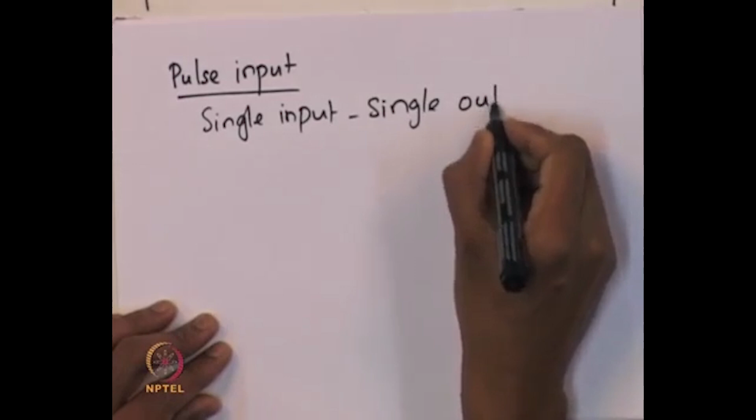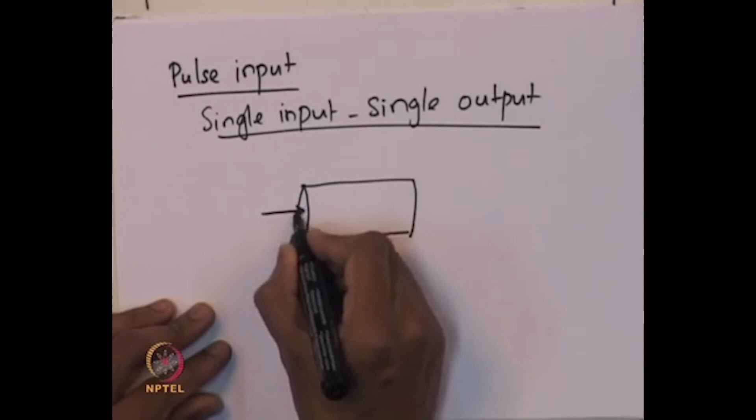So, now suppose we consider a single input single output system, that is, suppose there is a reactor, and there is a single input stream to the reactor and a single output stream from the reactor. And suppose there is a feed stream here, and let us say that we inject the tracer,

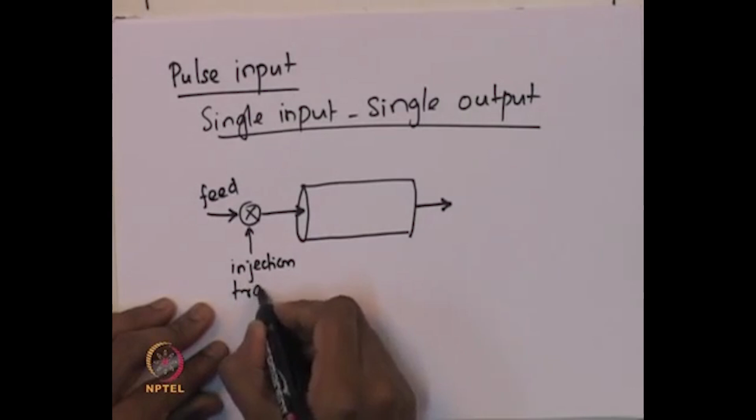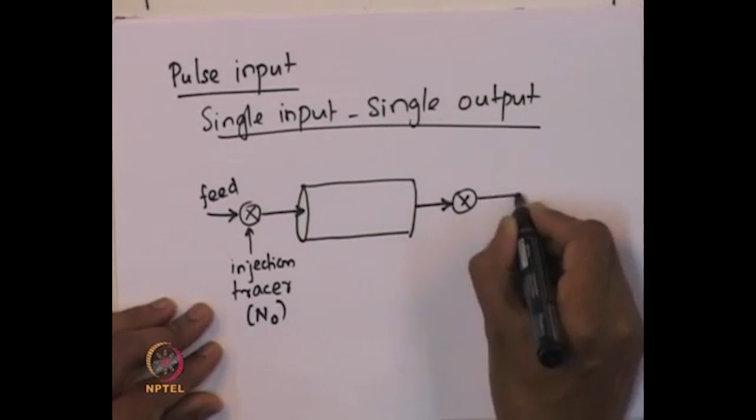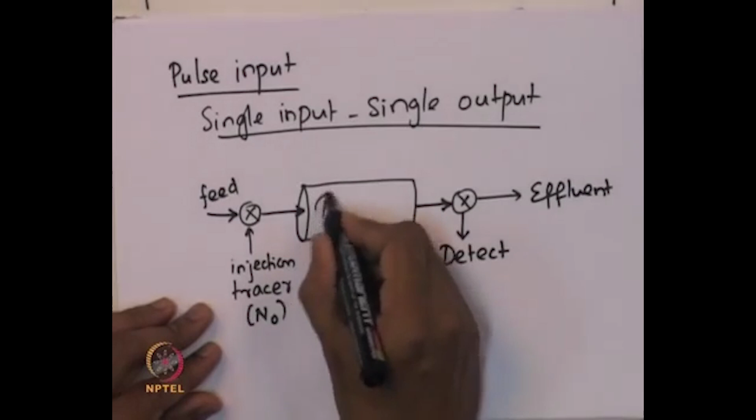along with the feed which goes into the reactor, and maybe the total concentration of the tracer is N naught, and it has to be a pulse tracer. We will describe in a short while what is meant by a pulse tracer injection. And then suppose there is an effluent stream, and we can detect the concentration of the tracer in the effluent. So, this is a reactor with a single input and a single output.

So, now the tracer that is injected has to be a pulse at a certain time. Let us say at time t equal to 0, we inject a pulse of tracer, that is, a certain concentration of the tracer in as short a time as possible is injected into the reactor. That is what is called a pulse input. Suppose this is the concentration of the tracer, and this is minus tau, some time before and some time later. Some time before the injection point there is no tracer in the reactor, and some time later also there is no tracer in the feed. So, just give a short pulse and then leave it.

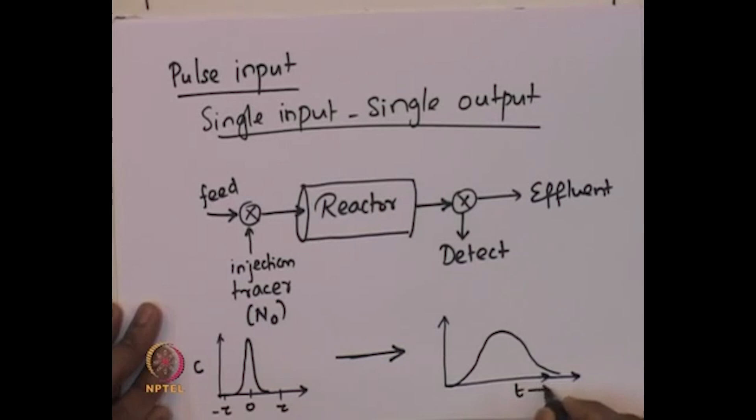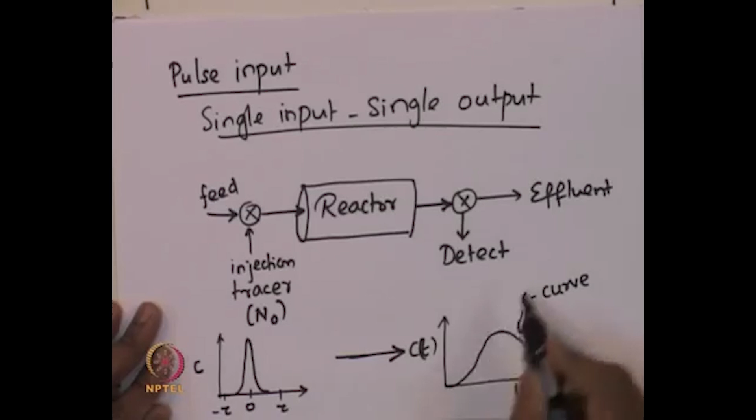Now, once we do this, if we monitor the concentration of the tracer in the effluent stream of the reactor, the kind of concentration profile that one will expect looks like this. This is time and this is the concentration of the tracer as a function of time. This kind of curve is what is called the C curve in residence time literature. So, the concentration of the tracer as a function of time is the C curve. So, now if such is a system, the question is how do we find this concentration curve? So, how do we find this?

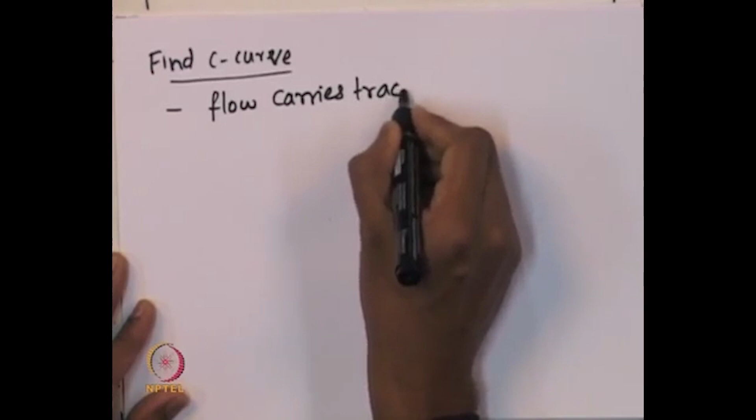We need to find the C curve, and how do we find the C curve? So, we have to make some assumptions. So, if we assume that the only fluid flow through the reactor is the only one which is actually carrying the tracer, which means that there is no dispersion between the point of injection and the entrance of the reactor. And later in one of the lectures, we will actually account for the presence of dispersion in the reactor.

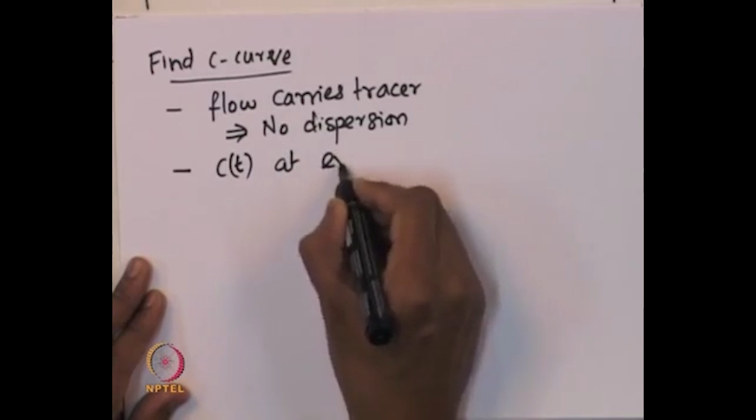Suppose we assume that there is no dispersion, and then we measure the concentration of this tracer at the exit, that is the effluent stream. Now, the trick to measure the concentration or to construct the C curve is basically to choose a very small time step delta t, and the delta t should be chosen such that the concentration of the tracer in the effluent stream within this delta t does not change significantly, and then measure the concentration of the tracer at every delta t which is very, very small.

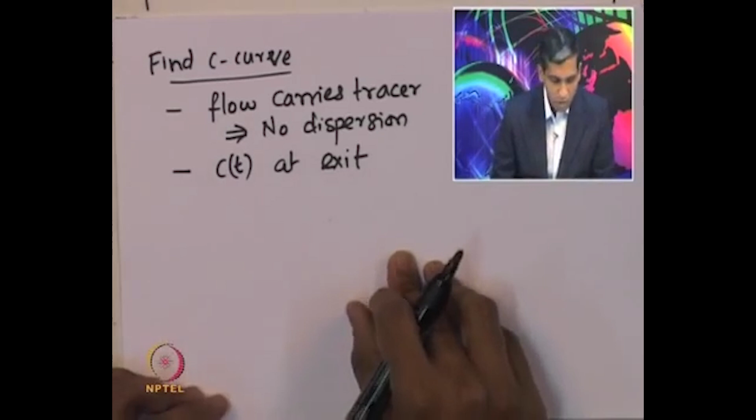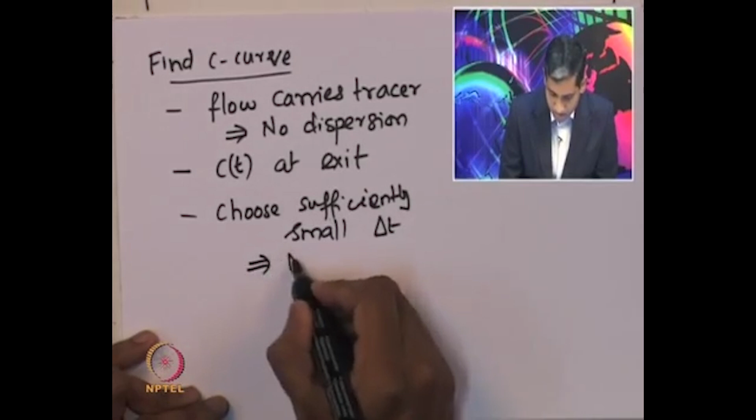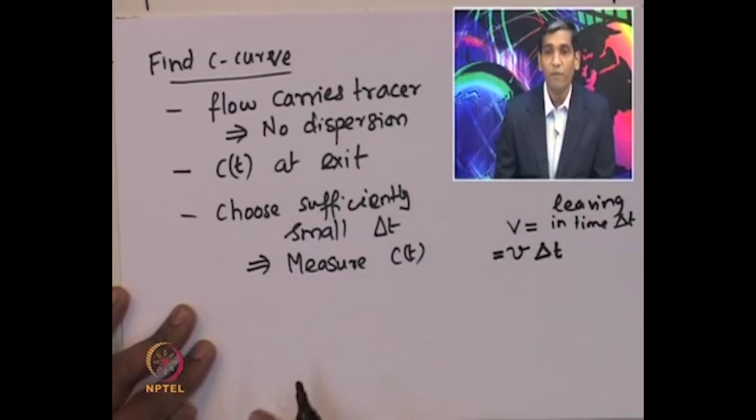So, choose sufficiently small delta t and then measure the concentration C of t. Now, once we measure this concentration, and suppose if v is the volumetric flow rate of the effluent stream, the volume of fluid leaving the reactor in time delta t should be equal to the volumetric flow rate of the effluent stream multiplied by the corresponding delta t.

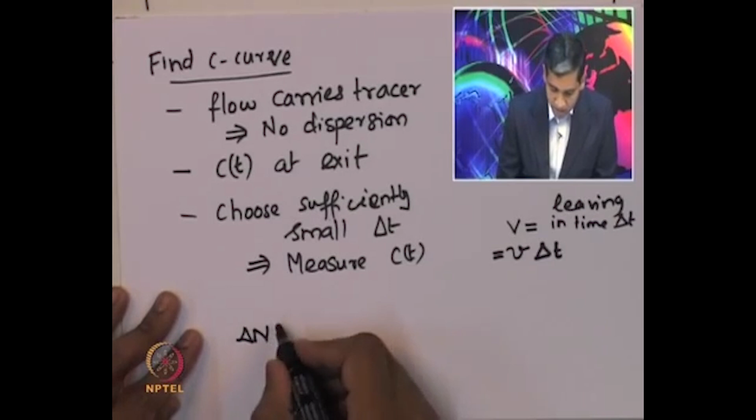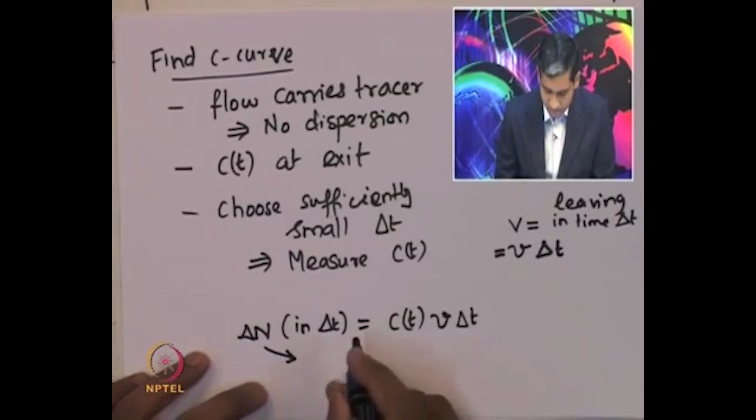So, therefore, the amount of tracer that is actually leaving the effluent stream in time delta t is given by the concentration of the tracer in the effluent stream at that time multiplied by the volumetric flow rate v multiplied by delta t. So, that gives the total amount of tracer that actually leaves in this time delta t. Now, what does this mean? This is basically the amount of tracer that has spent an amount of time between t and t plus delta t.

Then delta N by N naught is nothing but the fraction that has residence time, and remember residence time is the time spent by the material inside the reactor, somewhere between t and t plus delta t. So, if the time that certain amount of material has spent inside the reactor is between t and t plus delta t,

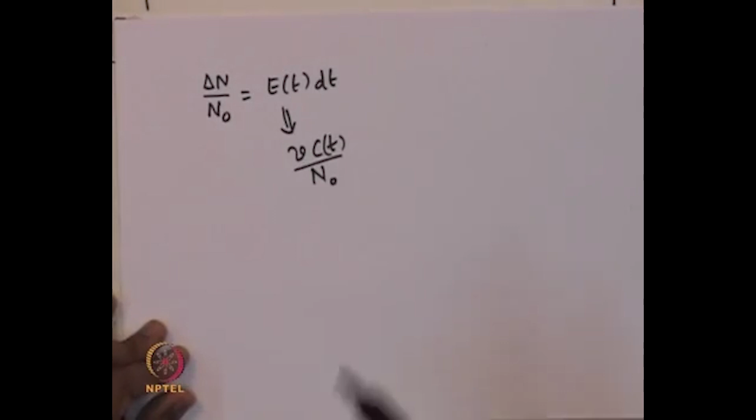What it represents is, it basically describes how much time different fluid elements have actually spent in the reactor. So, this quantity E of t, which is the residence time distribution function, quantifies or describes how much time different fluid elements have actually spent or resided inside the reactor before they leave the reactor. So, that is an important property of the vessel, of the reactor, which is captured in this residence time distribution function. So, what can we do with this?

So, if E of t basically describes the amount of material that is actually residing in the reactor, then E of t dt represents the fraction of fluid entering the reactor that has spent time between t and t plus delta t. So, it is very important to understand this function E of t times dt, that is the fraction of the fluid, delta n by n naught, which is the fraction of total fluid that enters the reactor and has spent time between t and t plus delta t.

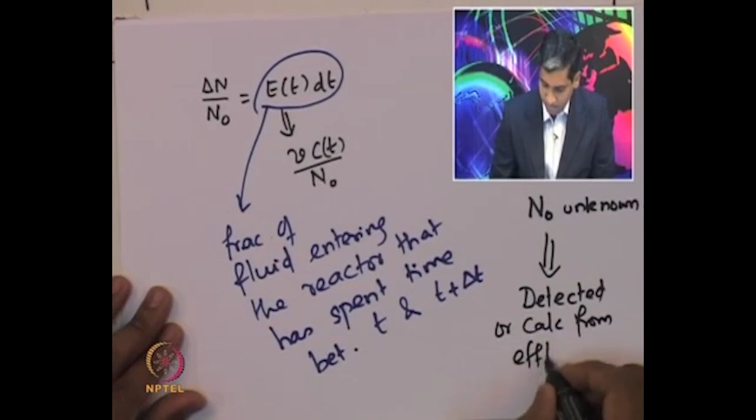So, suppose the total amount of tracer that is actually fed into the vessel, n naught, is unknown, which may be the case in many situations. Then n naught can actually be detected or calculated from the concentration of the tracer in the effluent stream. So, how do we do this? dN is essentially given by the volumetric flow rate V multiplied by C of t into dt.

So, therefore, n naught is the total amount of tracer fed into the reactor. Remember, it is a pulse tracer, that means there is a sudden injection of the tracer at a certain time over a very short time, and therefore, the total amount of tracer that leaves the reactor from time 0 to infinite time should be equal to the total amount of tracer fed into the reactor as a pulse. So, n naught will be the integral from 0 to infinity of V into C of t into dt.

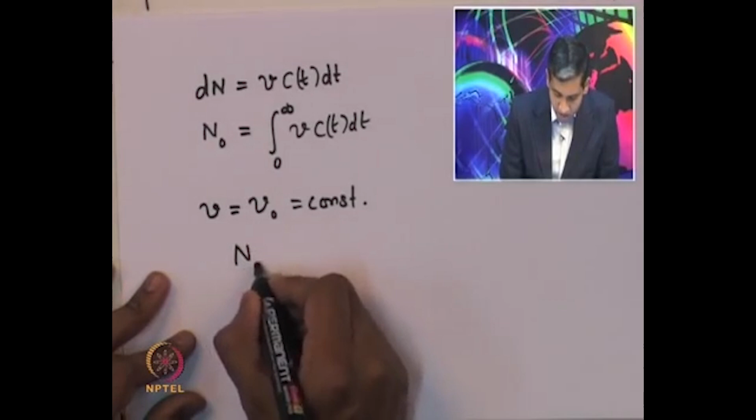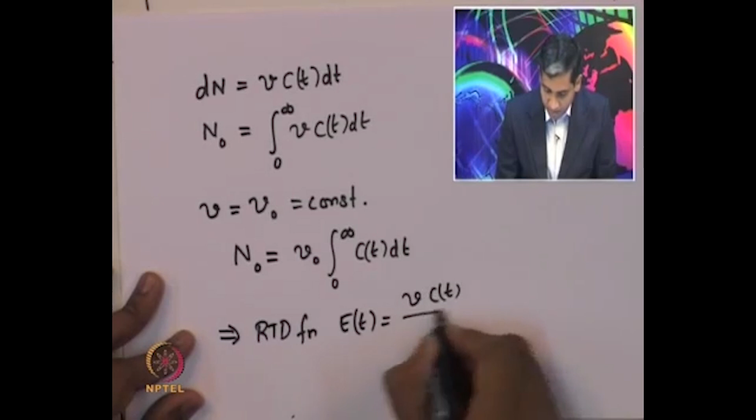Suppose we assume that the effluent stream volumetric flow rate is constant, then n naught, the total amount of tracer that has been fed inside, is given by V naught into integral 0 to infinity C of t dt. So, therefore, the residence time distribution function E of t is given by V into C of t divided by n naught, which is V naught C of t, because the effluent volumetric flow rate is maintained constant, divided by V naught into integral 0 to infinity C of t dt.

So, from here we can easily see that E of t is given by the concentration of the tracer at any time divided by the total amount of tracer leaving, or entering, the reactor. So, if I plot the effluent concentration versus time, suppose it is a bell shaped curve. That is the concentration of the tracer in the effluent stream as a function of time. Then the area under this curve is essentially n naught, the integral 0 to infinity V into C of t dt. So, a weighted area under this curve gives the total amount of tracer fed into the reactor.

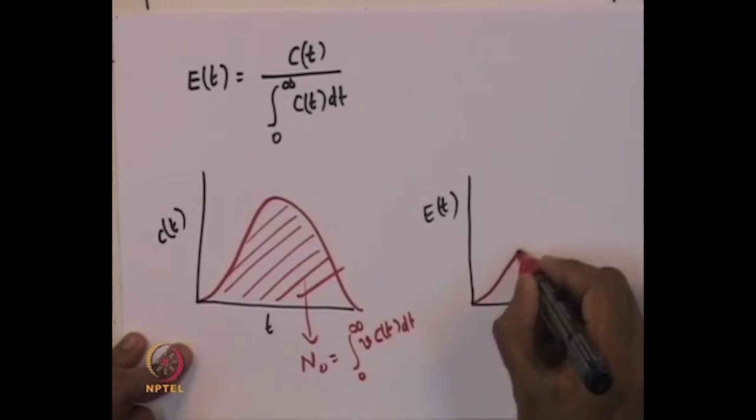So, now if I plot the corresponding residence time distribution function E of t, the curve essentially looks like this. So, this is the C curve. If the C curve is known, then we can actually find out the E curve. But in order to find the E curve from the C curve, we need to be able to integrate the expression or find the area under the C curve. Only if we are able to find the area under the C curve will we be able to construct the residence time distribution function.

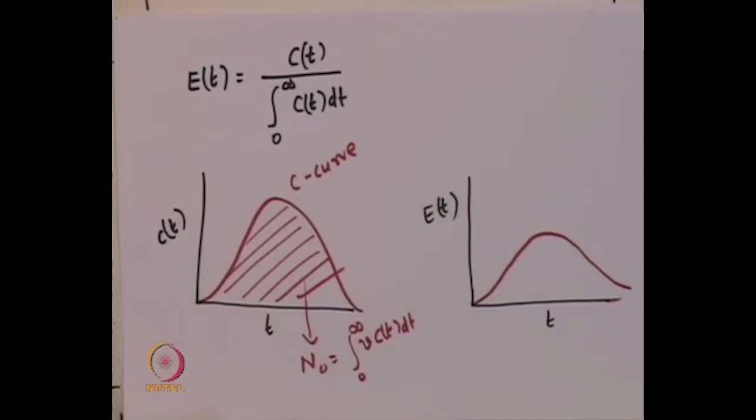So, now from this we can actually find out what is the fraction of material that is leaving the reactor with a specified residence time, a specified range of residence time. So, suppose I want to know what is the fraction of material leaving with residence time

between T1 and T2. So, I want to know what is the fraction of the material which has been fed into the reactor and that has spent sufficient time, but the time that it has spent is between certain times T1 and T2. So, that fraction is essentially given by integral T1 to T2 E of t dt.

So, if we know the residence time distribution, then a lot of information about the reactor can actually be extracted from the RTD function. Now, suppose I want to know what is the fraction that leaves the reactor with residence time from t equal to 0 all the way to infinity, which means the amount of material which leaves the reactor with residence time in the whole spectrum of time.

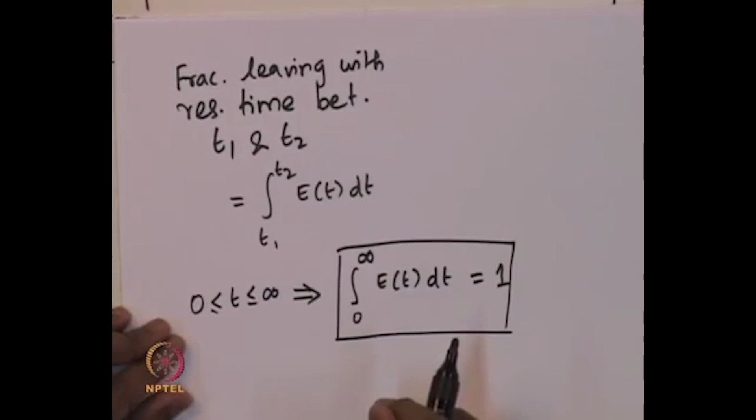So, that will simply be given by, for 0 less than or equal to t less than or equal to infinity, that fraction will simply be 0 to infinity E of t dt, and that is equal to 1. Which means the area under the RTD function curve is 1, which is true because it is a fraction, and so the area under the curve should be equal to 1.

Now, the question is how good is this pulse input method? Can it be used in all situations in order to find out the residence time distribution function? And that is really not the case. There are certain limitations. So, it is important to obtain a reasonable pulse as the input, and that is often not very easy to do. So, it is very difficult to get a reasonable pulse as input.

Why is that? Because the injection has to be done in a very short period, and a sufficient quantity of the tracer has to be injected in this very short period. So, it is not very easy to perform such an experiment where the tracer is actually injected into the stream in a very short time and in sufficient quantity. So, injection has to be in a very short time.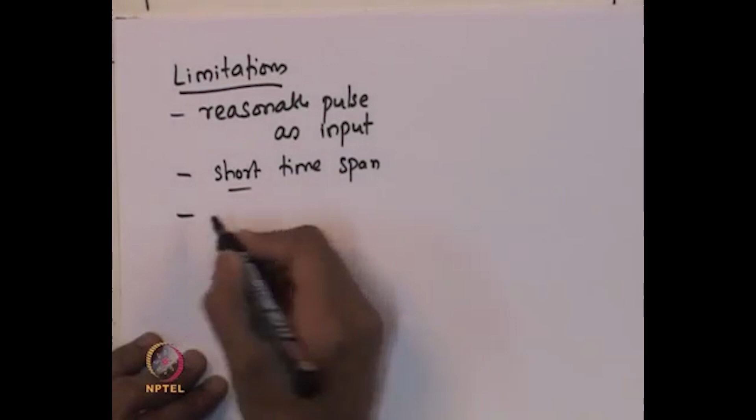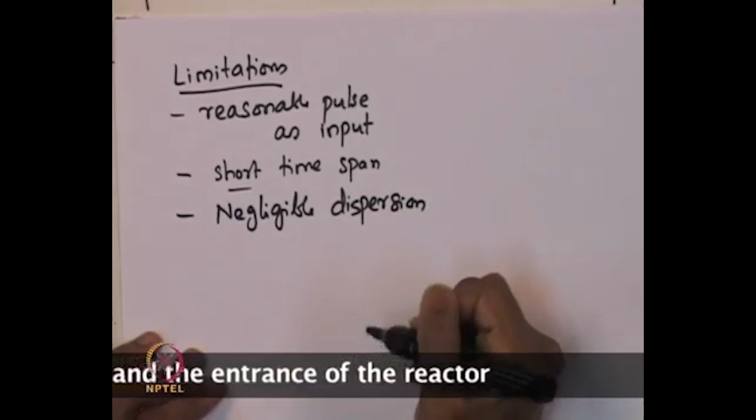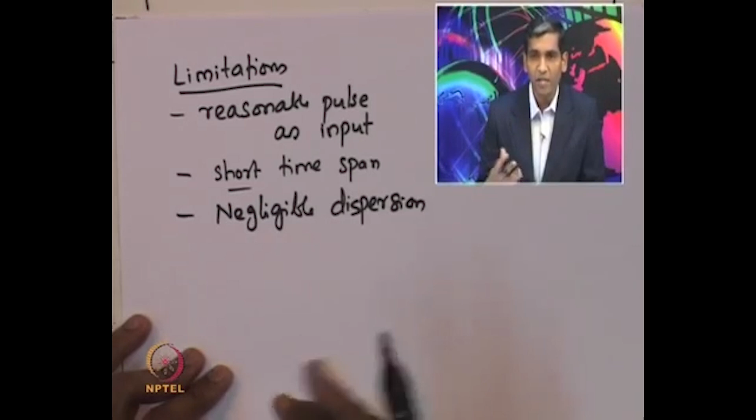It has to be in a very short time span, and more importantly, the reactor must have a negligible amount of dispersion between the point of injection and the entrance of the reactor, over which very limited control can actually be established. One cannot control the extent of dispersion. So, if the reactor has reasonable dispersion, then this pulse input method simply does not provide a clean way to find the residence time distribution.

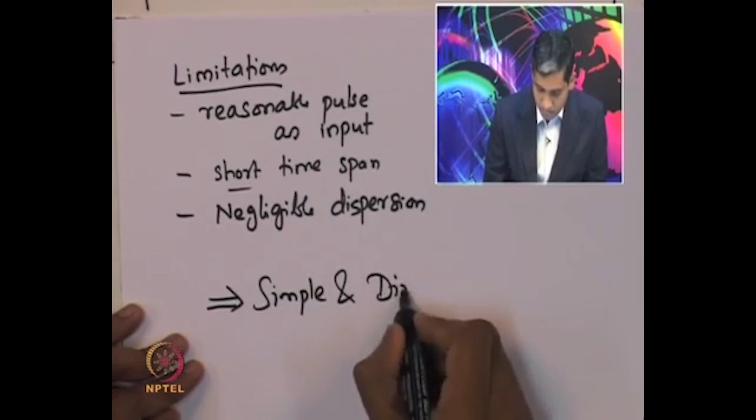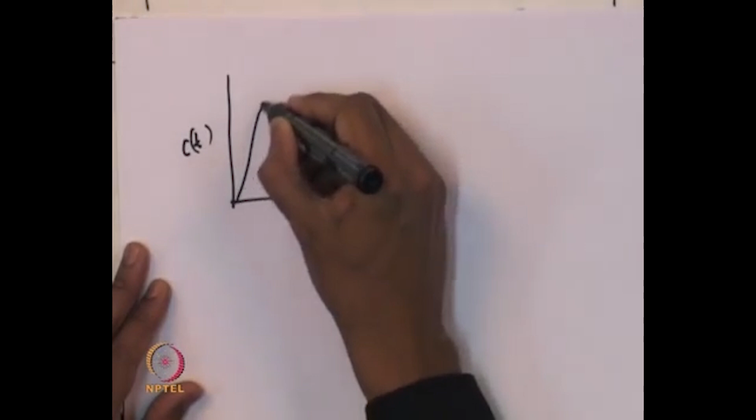However, the pulse input method is a very simple and direct method, provided these three conditions are actually satisfied. Now, another important caveat associated with the pulse input method is that if I look at the concentration curve, in certain situations there can be a very long tail present in the C curve. So, this is the C curve.

So, now the concentration curve has to be integrated. Remember that E of t is given by C of t divided by integral 0 to infinity C of t dt, provided that the effluent volumetric flow rate is constant, there is no dispersion, etc.

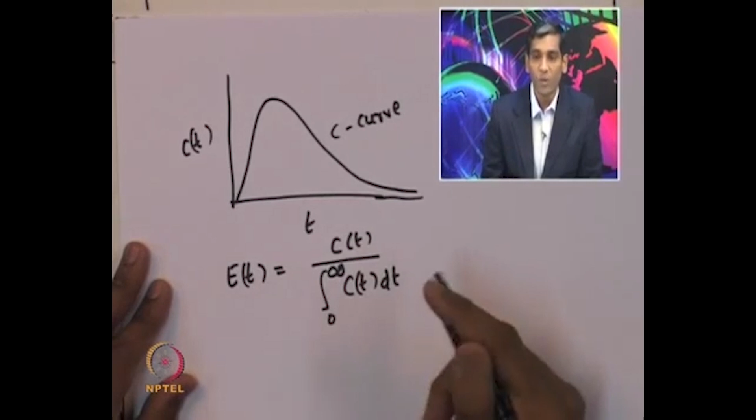So, in order to perform such an integration, one needs to do a numerical integration of this C curve, and if the tail is very long, then it is not easy to integrate this expression numerically, and it can actually cause inaccuracies in the integral. So, therefore, the long tails can lead to inaccuracies in estimating this integral.

And therefore, one specific method to circumvent this problem is to approximate long tails. If a long tail is observed, approximate the long tail with exponential decay. So, assume that the long tail is exponentially decaying, and now it is an analytical function and it can be used to find the integral of C of t dt to a reasonable accuracy.

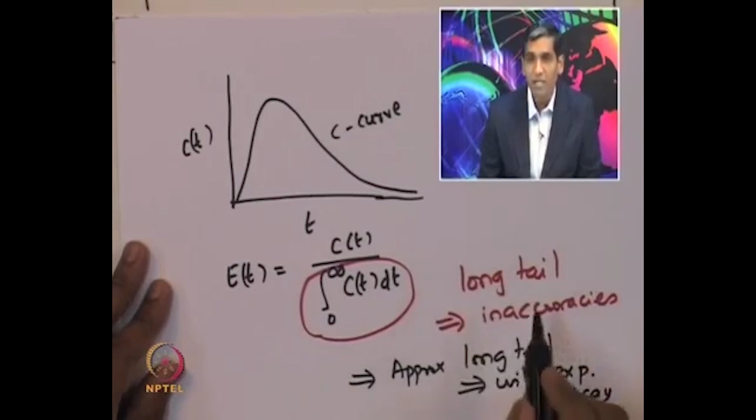So, therefore, if there is a long tail, then it can lead to all kinds of numerical issues in estimating the RTD. So, let us quickly summarize the steps involved in actually finding the E curve.

So, steps to find the E curve: the first step is basically to inject a tracer. So, inject a pulse tracer and then collect data, and by collecting data one would actually get a table of time versus C of t. So, at different times one can actually find out what is the concentration of the tracer in the effluent.

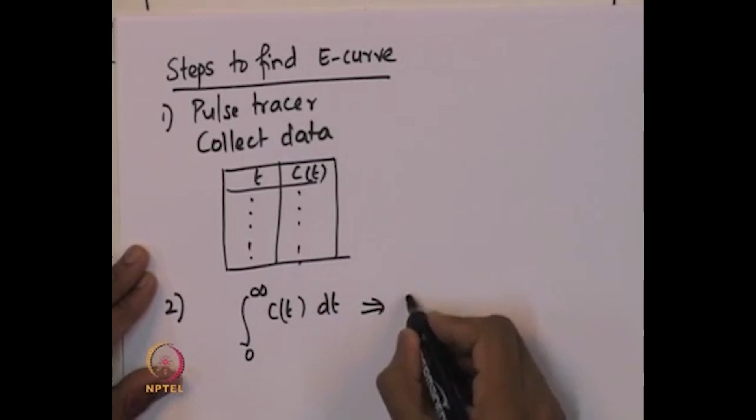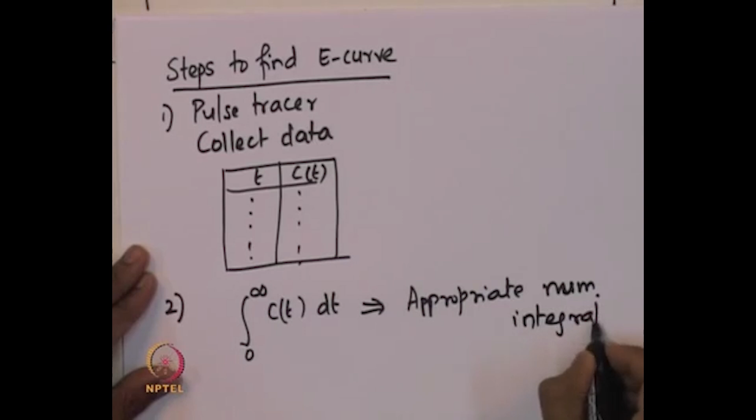Now, once this data is available, then one needs to find out this integral C of t dt by using an appropriate numerical integration scheme. By using appropriate numerical integration, one can actually find out what is this integral between 0 to infinity C(t) dt, which is basically the area under the C curve, and the last step is to find out the E of t, which is C(t) divided by integral 0 to infinity C(t) dt. So, that is the area under the curve. So, these are the three steps that have to be followed in order to find the E curve.

So, now if we know the E curve, we know the RTD function, and we estimated the E curve using the concentration of the tracer at the output. Now, the input that was given in order to estimate such a C curve is basically a pulse input. Now, the question is, is there a connection between the input concentration profile and the output concentration profile? So, the answer is yes, there is. So, are our tracer concentrations related?

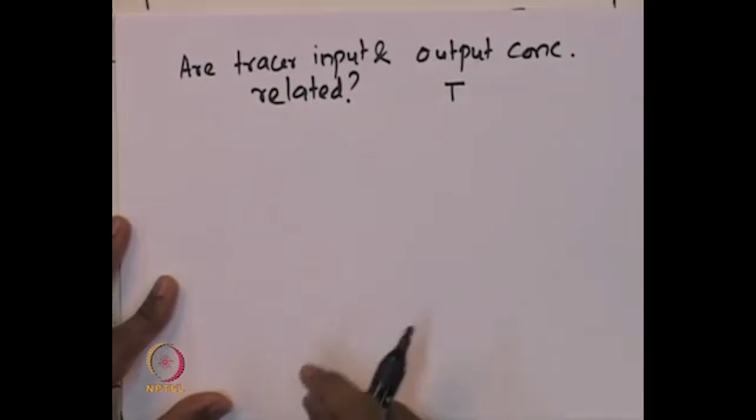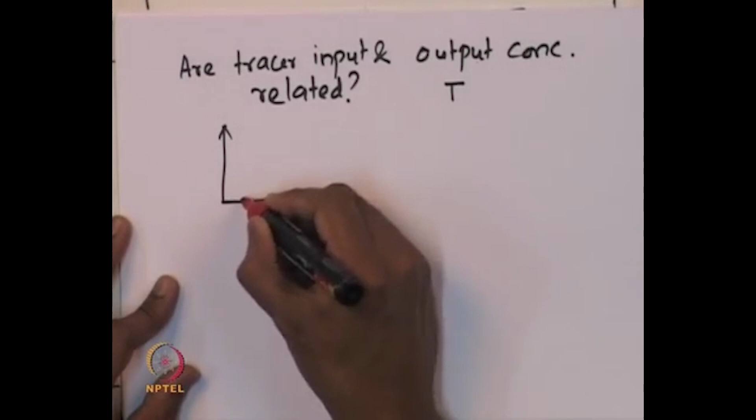Are they related? So, suppose T is the tracer that is actually fed into the reactor, and now suppose this is the input concentration profile to the reactor, and after going through the reactor, the tracer is actually measured in the effluent stream, and let us say the concentration of the tracer in the effluent is given by this curve here. So, that is C out. So, that is the in, and that is the concentration of the tracer in the outlet stream or the effluent stream.

So, now suppose I place them in the same graph. The objective is to find out the connection between this concentration profile and this concentration profile. So, that is my input stream, and suppose the corresponding output stream is this. Now, I can write a material balance to find out the relationship between the concentration of the species coming out of the reactor at a certain time and the concentration of the tracer at the inlet. So, suppose I take a specific element at a certain time t, and similarly a small element here at t minus t prime. So, it is exactly the fluid stream that is entering the reactor at a time t prime smaller than the time t at which I am monitoring the concentration in the outlet stream.

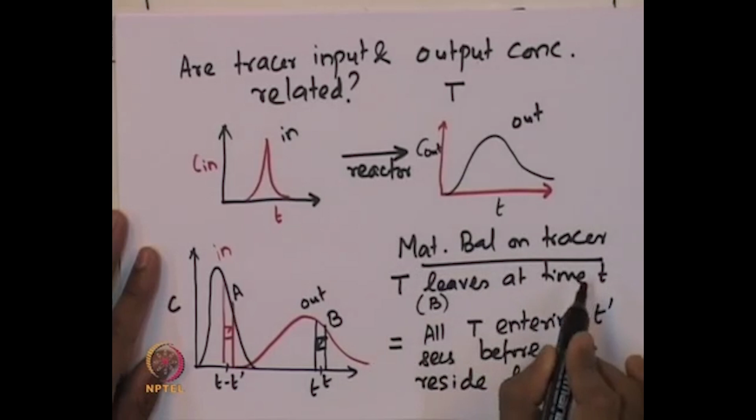So, now I can write a material balance on the tracer T. The tracer which leaves at time t, which is basically the one in rectangle B, suppose I call this rectangle B and this rectangle A, should be equal to all tracer entering t prime seconds before t, which reside in the reactor for t prime. So basically the amount of tracer that leaves at this time should be equal to all tracer that has entered t prime before this time t and resided for that span of time t prime. So that is the material balance which connects the amount of tracer that leaves the reactor and the amount of tracer that enters the reactor.

So now this can be rewritten as: the amount of tracer leaving at t, that is rectangle B, should be equal to the sum over all rectangles A, that is all rectangles in the feed stream, of the amount of tracer in each rectangle multiplied by the fraction of tracer in rectangle A that resides for t prime.

So the amount of tracer that actually enters the reactor at a time t prime before the time t, which is basically the time at which the certain tracer species is actually leaving the reactor, and I am attempting to connect that to the amount of material that has actually come into the reactor, and so that should be equal to sum over all rectangles, that is the amount of tracer that is present in each of the rectangle multiplied by the fraction of tracer in that particular rectangle that resides for the t prime seconds in the vessel.

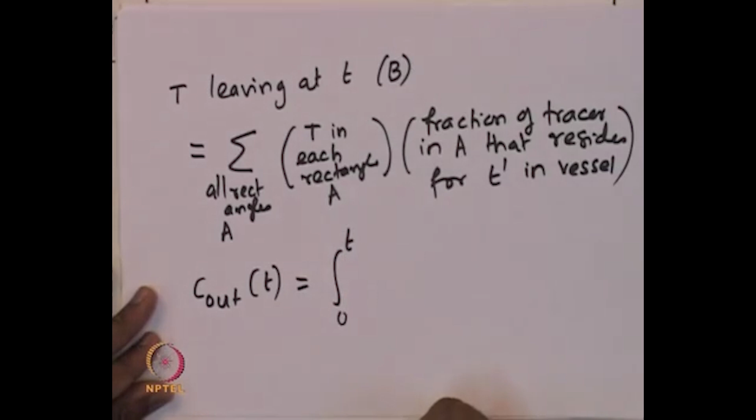So now if I plug in the corresponding quantities, so if I write this expression in terms of the integral, it will be the concentration of the species in the outlet stream, that should be equal to 0 to t, that is the total amount of time that I am monitoring, multiplied by the concentration of the species in that rectangle. So this corresponds to the concentration of the tracer in each rectangle, which is actually injected exactly t prime time before the time at which the concentration of this particular species is being monitored, multiplied by the fraction of the species that actually spends t prime time inside the vessel.

So that is the relationship between the concentration of the tracer that is actually fed into the vessel and the concentration of the tracer that actually leaves the vessel at any time t. So this kind of an integral is what is called as the convolution integral. So this relationship between the input and the output concentration is actually very useful to find out various aspects of the reactor using the RTD function.

So next let us look at the step input case. In the case of pulse input, we actually found out the E curve. In a similar fashion, here we are going to define a curve called F curve, which is actually called the cumulative distribution function. So now in a step input case, what is done is, suppose you take a single input single output vessel,

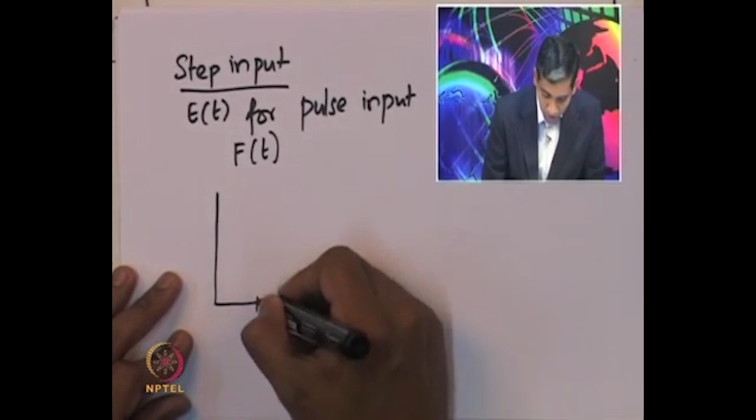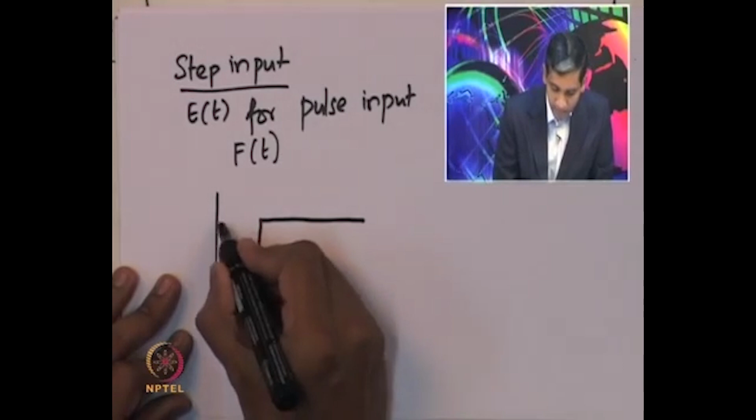and then at some time t equal to 0, suddenly you inject a certain concentration of the tracer into the feed, and then the concentration of the tracer is actually maintained. So, basically it is a step function, and let us say that this concentration is some C naught. So, this is the inlet concentration of the tracer into the feed stream as a function of time.

So, the mathematical representation of that will be C in as a function of time will be 0 if t is less than 0, and that should be equal to some constant C naught if t is greater than or equal to 0. So, we assume that we are able to feed a constant concentration of the tracer into the feed stream,

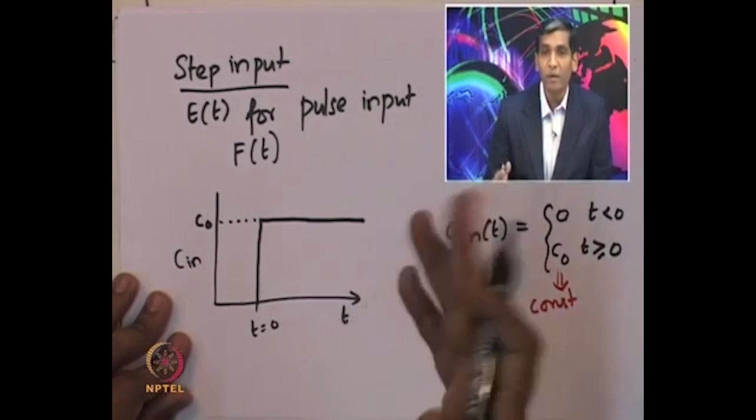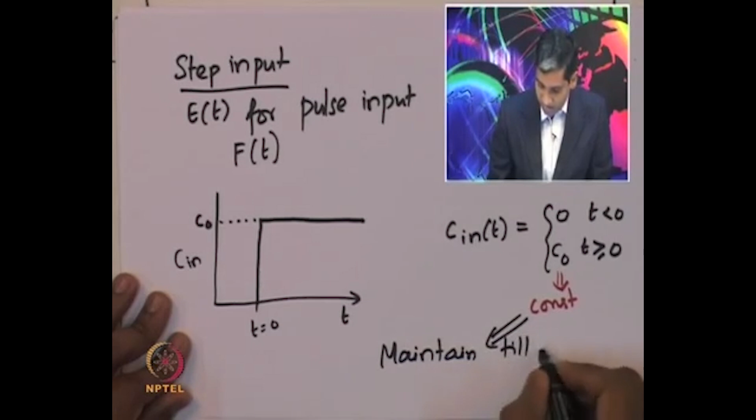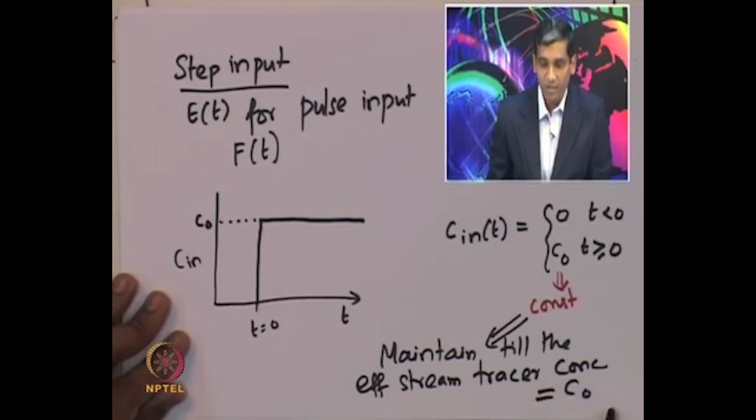and till what time do we have to maintain it constant? We have to maintain it constant till the effluent stream tracer concentration is equal to C naught. So, we maintain the concentration of the tracer in the feed at some constant value C naught until the tracer concentration in the effluent stream is exactly equal to or almost equal to the feed concentration of the tracer which is actually maintained in the feed stream.

So, while doing this we can actually measure the concentration of the tracer in the effluent stream, soon after the step input is given. So, the first step is to give a step input, let us say at some concentration C naught, and then the second step is to measure the concentration of the tracer as a function of time in the effluent. So, that is the second step in the step input experimental method.

And then if we look at the schematic of the outlet concentration of the tracer, it will essentially look something like this, where as a function of time the concentration of the tracer is going to slowly increase from 0. At the time when the step input is provided, there is no tracer present in the effluent stream. So, therefore, at time t equal to 0, it will start at 0 concentration, and then the tracer is going to slowly move through the reactor, and then appear in the effluent stream.

And so, once the concentration is measured, the concentration slowly increases till it approximately reaches the constant concentration with which the tracer is being maintained at the feed stream to the reactor. So, till it reaches that concentration, one has to measure the concentration of the tracer in the effluent stream. Once it reaches that concentration, then the step input can be stopped and the experiment is done. So, now once we measure this concentration versus time data, what can we do with this?

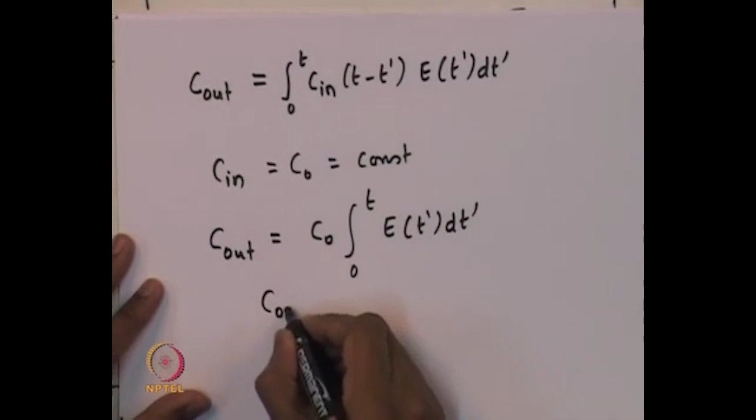So, from here, because it is a step input and the concentration of the tracer in the feed is actually maintained constant at C naught, this is basically equal to C naught, and that is a constant, and therefore, C out will be C naught into integral 0 to t E of t prime dt prime, or C out by C naught is equal to integral 0 to t E of t prime dt prime.

So, this integral over the E curve or the RTD function is what is called the cumulative distribution function F of t. So, F of t is essentially the concentration of the tracer in the output divided by the concentration of the tracer which is actually maintained in the feed stream, and this is for the step

input method. So, therefore, it can easily be shown that E of t is equal to the first differential of F with respect to time, or d by dt of C of t divided by C naught. So, F basically says what is the fraction of that fluid which is actually leaving the reactor with a certain residence time.

So, what are the advantages of the step input method? The advantages are that it is easier to perform this experiment, because the experiment involves maintaining a certain concentration of the tracer at a certain level. One may not be able to maintain exactly at that level, but it is much better than giving a pulse input, because in the pulse input a certain fixed quantity of the tracer has to be fed in a very short time period. So, therefore, it is easier to perform the experiment, although it may be difficult to maintain

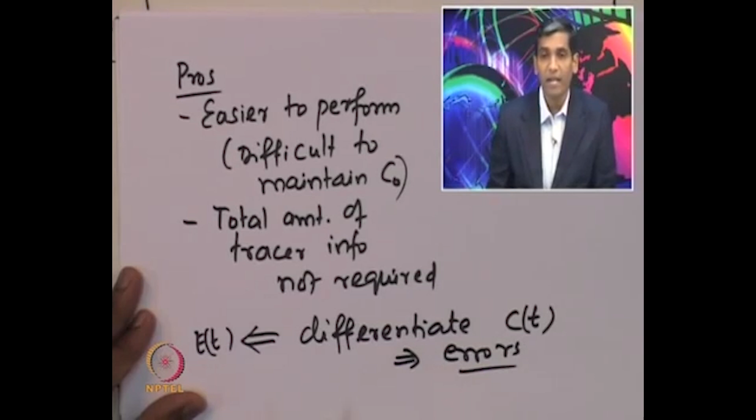However, in order to find the E curve, one needs to actually differentiate the data, and that may lead to some errors. So, some errors may creep in while differentiating the concentration of the tracer as a function of time in the effluent stream.

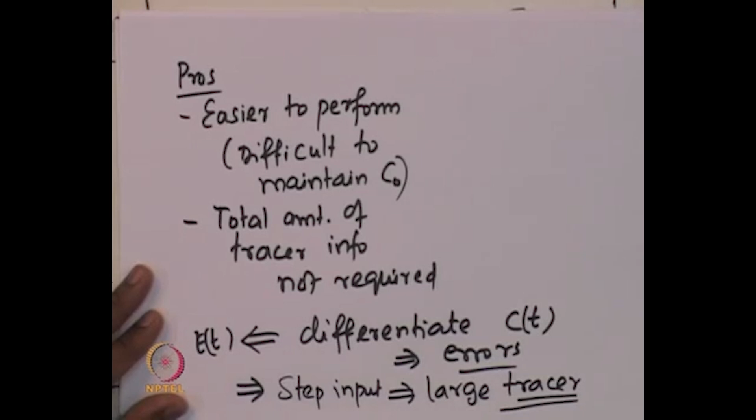Now, another major drawback of this particular method is that because one has to maintain a step input, the step input will require a large quantity of tracers, and if the tracer is an expensive material, it is not a very economical method to conduct an experiment to measure the RTD function.

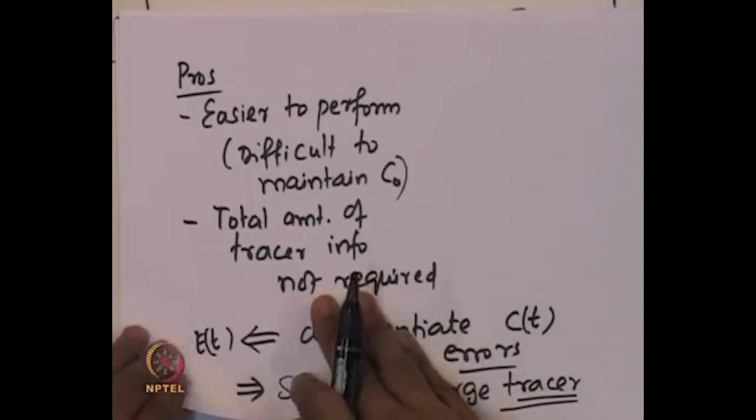So, are there other tracer techniques to measure the RTD function? The answer is of course yes. There are other tracer techniques, but these are not very commonly used because it is difficult to perform these experiments. One is the negative step tracer, where the concentration of the tracer is suddenly decreased, and it is not very easy to perform such an experiment. Basically, there is an elution or dilution of the tracer in the feed stream. And another method which is used is called the frequency response method.

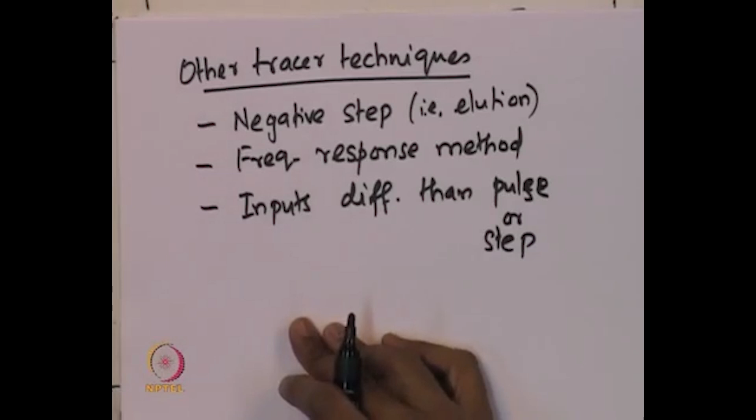It is called the frequency response method, and the third method is basically one can use inputs which are other than pulse or step method. So, there can be other types of inputs that can actually be provided, and these are not very common methods, and so it will not be discussed in this course.

So, next, after finding the RTD, one needs to know what are the characteristics of this RTD function, because we are interested in finding the non-ideal behavior of the reactor, and we said that the RTD function somehow captures some information about the non-ideal behavior of the reactor. So, we can now estimate what are the characteristics. So, the characteristics of the RTD function perhaps may provide some clue about the characteristics of the non-ideal behavior of the reactor itself.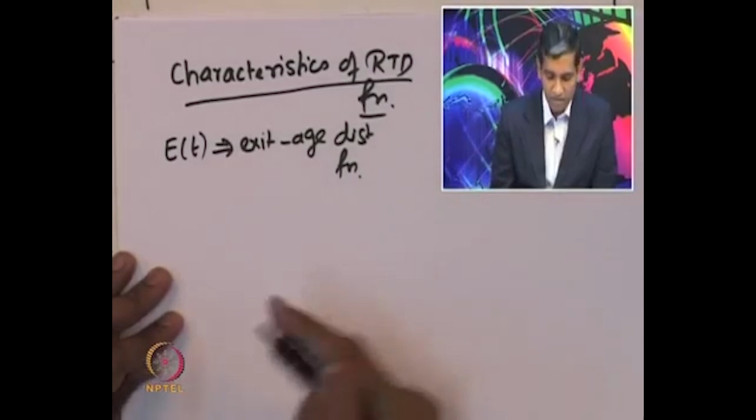So, suppose E of t, which is the RTD function, is also called the exit age distribution function, and let us define what is meant by age of, let us say, an atom or a molecule of a material. The age is defined as the time that is spent by the atom or molecule in the reactor vessel. So, that is what is defined as the age of that particular atom or molecule of the material

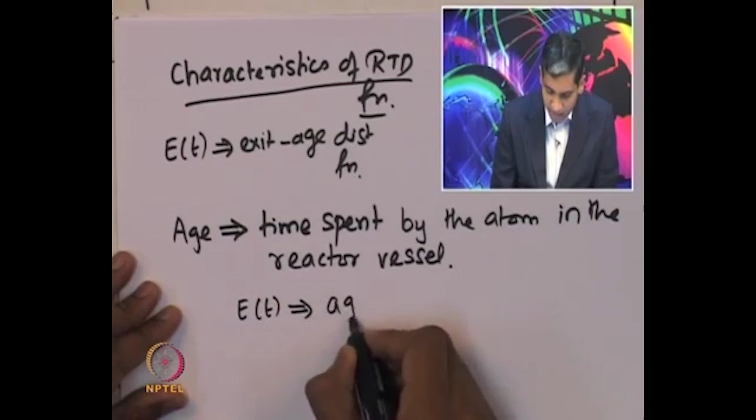which is actually being considered. So, therefore, clearly E of t is essentially the age distribution of the effluent stream, as measured by the concentration of the species in the effluent stream. That is the RTD function E of t. So, now there are some definitions. In order to characterize the RTD function and decipher some of its properties, we need to define some quantities, and the first one is F of t.

So, F of t is essentially the fraction of the effluent which has resided for a time smaller than t. So, F of t is the fraction of effluent resided in the vessel for time less than t. So, how is that defined? F of t, as we have seen in the step input case, is defined as the integral from 0 to t of E of t dt. So, that is the fraction of the effluent that has resided inside the vessel for a time which is less than t.

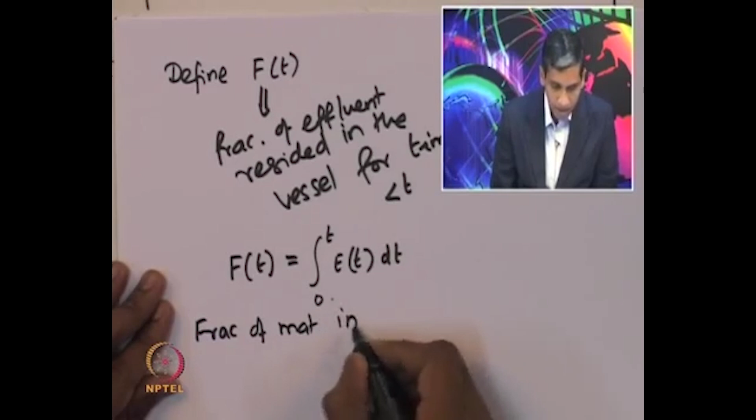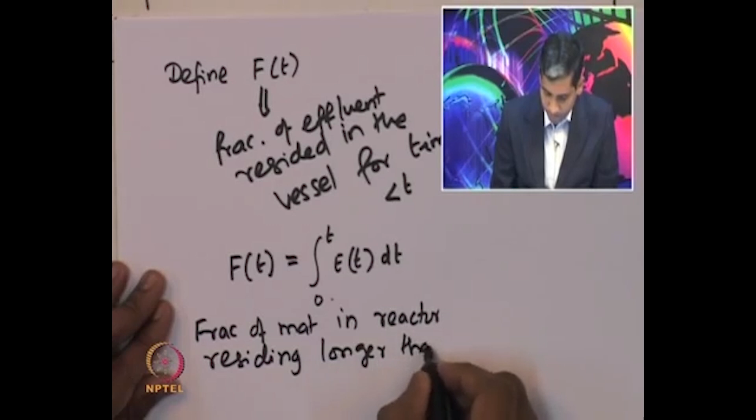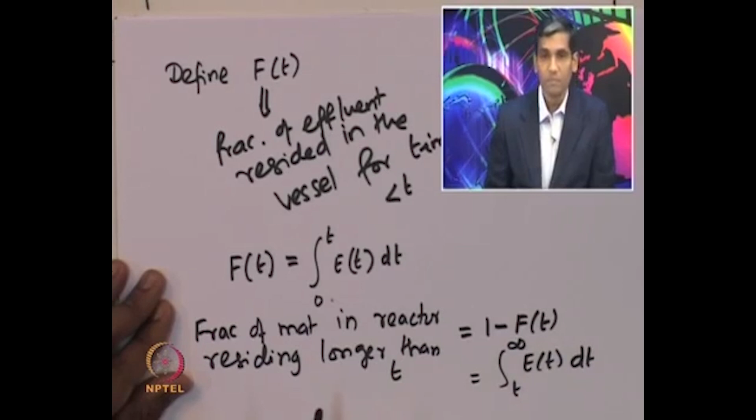Now, one can also define the fraction of the material which is residing inside the reactor for a time longer than t. So, one can define the fraction of material in reactor residing longer than time t, and that is given by 1 minus F of t, which is equal to the integral from t to infinity of E of t dt. So, the sum of these two is obviously equal to 1.

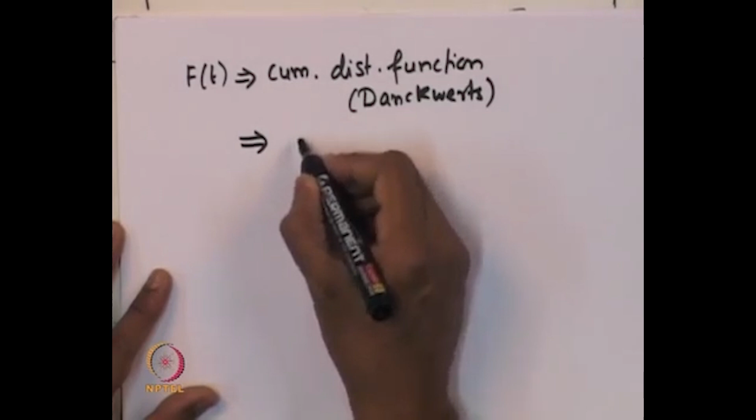So, F of t, as mentioned earlier, is nothing but a cumulative distribution function, and such a definition was given by Professor P. V. Danckwerts. Danckwerts was the one who came up with this name for F of t, and this is basically the area under the E curve, as we can read from the integral. So, if we sketch F of t versus time,

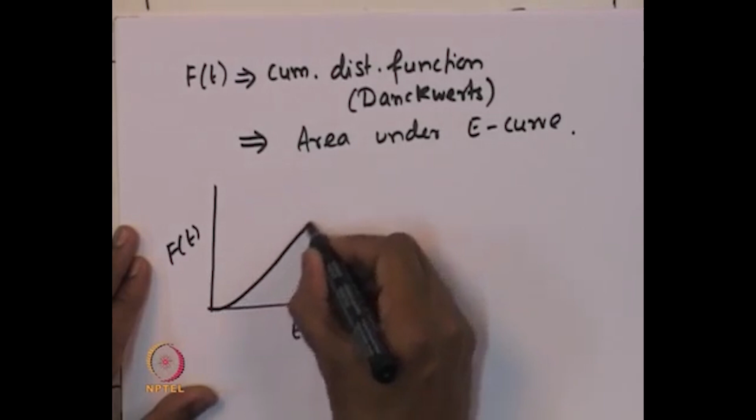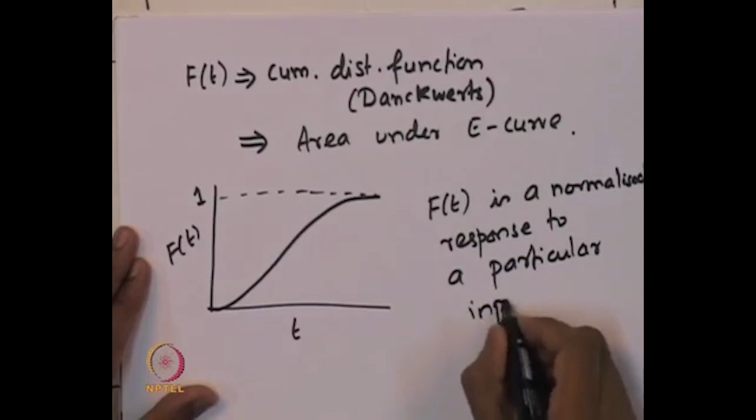the maximum possible value that the F curve can take is exactly equal to 1. So, F of t is essentially a normalized response to a particular input that is actually fed into the reactor.

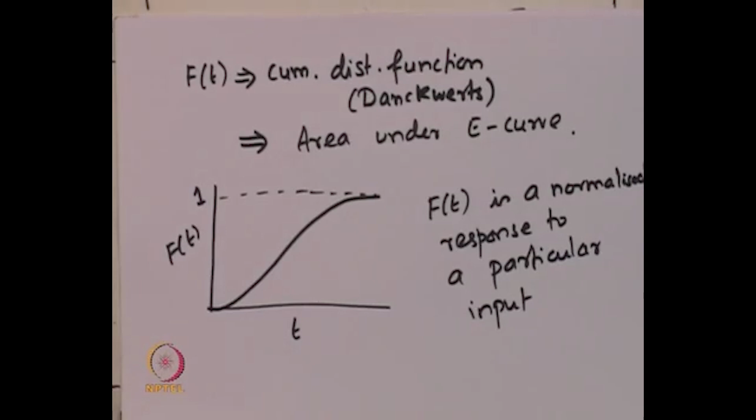So, let us summarize what we have learnt in today's lecture. We have looked at the properties of the tracer required for it to function as a tracer to estimate the residence time distribution function. And then the two injection methods, the pulse input and the step input method, to decipher the residence time distribution function, and the different curves like the concentration curve, the E curve and the F curve, which characterize the residence time distribution in the pulse and step input methods.

And then we looked at the convolution integral which connects the concentration of the tracer at the input of the reactor and the concentration of the tracer as measured in the effluent stream.